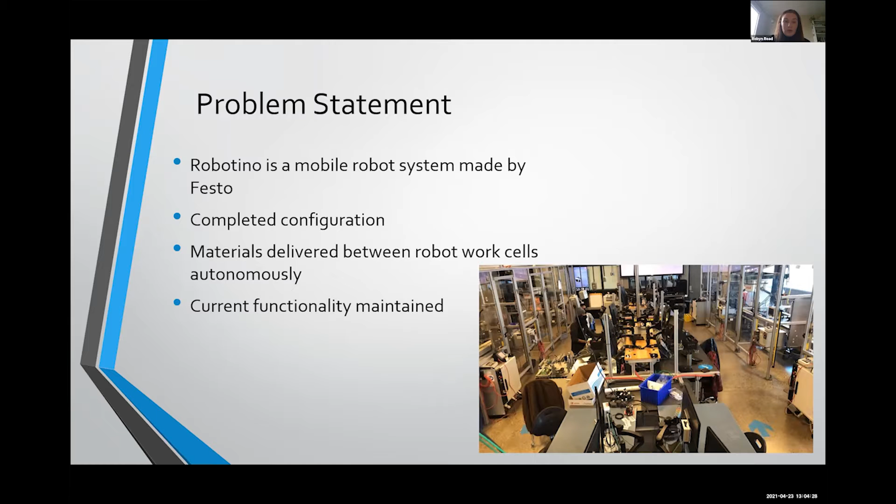The scope of this project involved the development of an autonomous guided vehicle that is based to work on a Robotino platform. It is commissioned for use as a method of transfer of materials between work cells in the SAIT Mechatronics lab. An example of the work cells are to your right there. Proper wiring has been completed on the Robotino based off the professional practice judgment guidelines used in mechatronic skills competitions, and electrical documentation has been provided. A gripper conveyor system has been designed to transfer parts.

The Robotino is programmed to autonomously function in the lab while students and instructors are present. Safety of instructors and students is a top priority. Autonomous battery tending is included in the functionality of the Robotino's programming, and this project will contribute to the vision of a fully autonomous lab. Next slide, please.

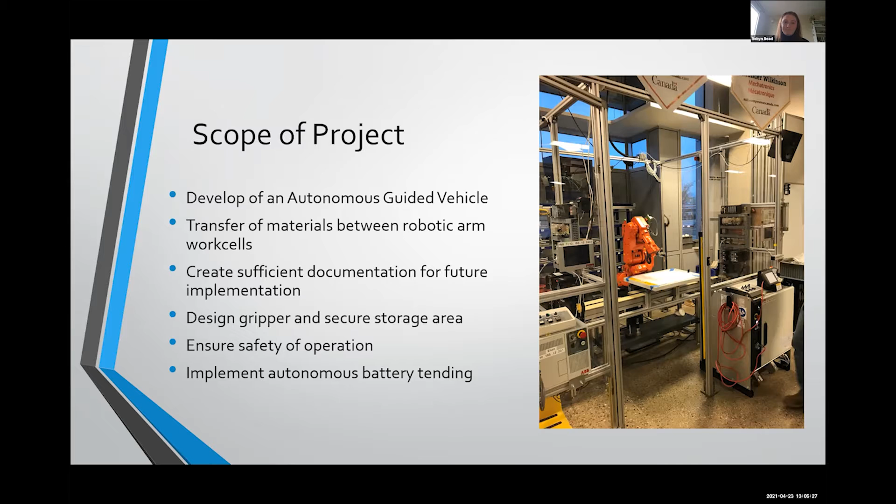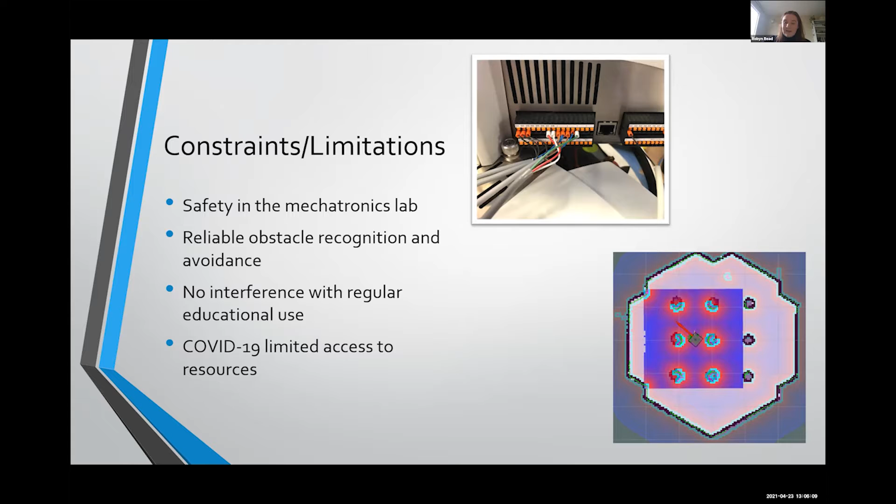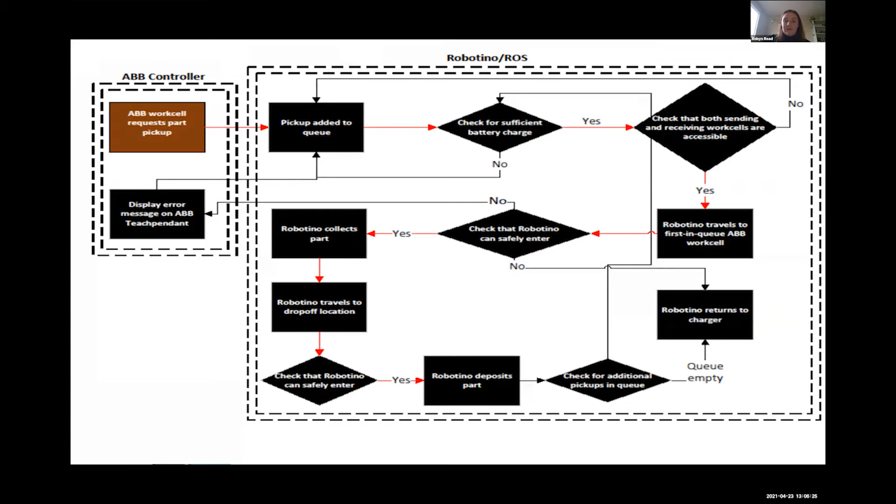The information hub will hold the status of the ABBs and confirm whether a call for transport is able to be placed. The team has programmed 2 executable procedures that are able to be added to any routine programmed on the ABB robots. These procedures will allow the user to request part movement from the Robotino. The user input will be sent to the information node where the status of each ABB is monitored. And if the ABBs are safely able to send and receive materials, the request will then be forwarded to the Robotino containing any necessary information such as coordinates for the pickup and drop-off. Next, we will go to Devin, who will discuss our program logic.

All right, so as we can see in the functional analysis here, once the pickup is requested, the first thing the Robotino does is check for sufficient battery charge. And it is able to do this because the battery information is constantly being provided to ROS in the event that it should be called. Before the call is actually placed, there's a great deal going on at once in the background, and that brings us to the strengths of ROS and why we chose it.

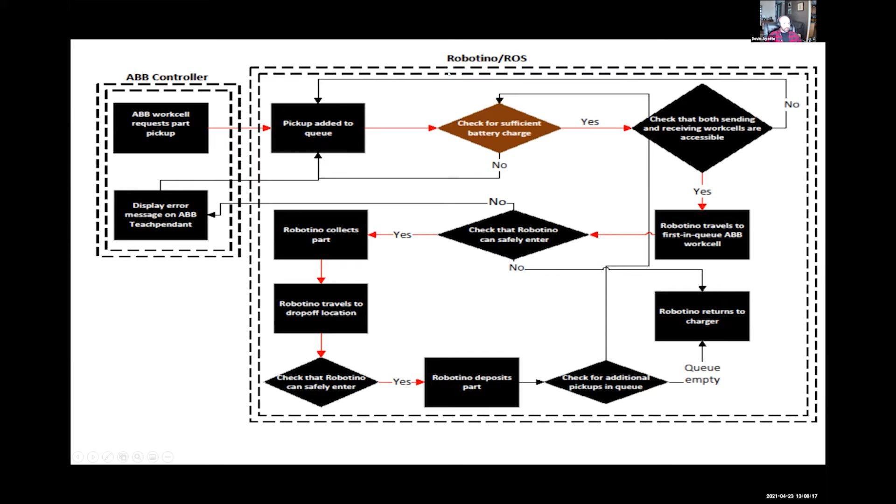It structures all of this inter-process communication in black boxes called nodes. So it's very easy to collaborate using ROS. You write your portion of it with a defined input and output, and this part can be used, reused, edited, and most importantly, developed independently of the rest of the program.

You establish what's going in, what's going out, and you don't need to coordinate as much with other groups or other members of the group as you're developing this. This makes collaboration simple, but it does come at the expense of some fairly inelegant solutions to very simple problems. And we'll get into this in our conclusion and recommendations.

We found that often the solutions that we were using provided by ROS were a lot more complicated than the problems, as there are many different elements, sources of information, inputs, outputs going into this program. And I will now pass it off to Damien to discuss the navigation.

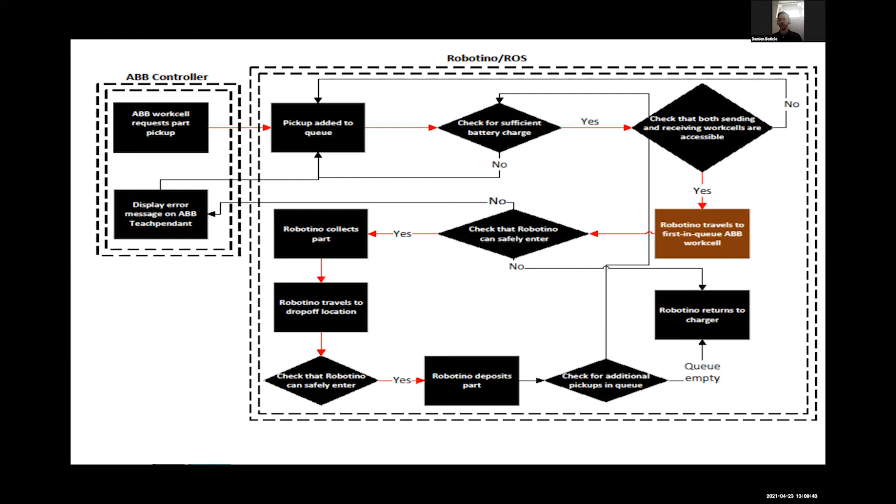Thanks, Devin. Next step is to travel between the ABB cells. And in order to do that, we make use of 9 existing infrared sensors at the base of the Robotino, as you can see in the next slide, bottom right picture, to sense close objects. In addition, we added a Kinect structured light depth camera for 3D imaging and long-range obstacle detection.

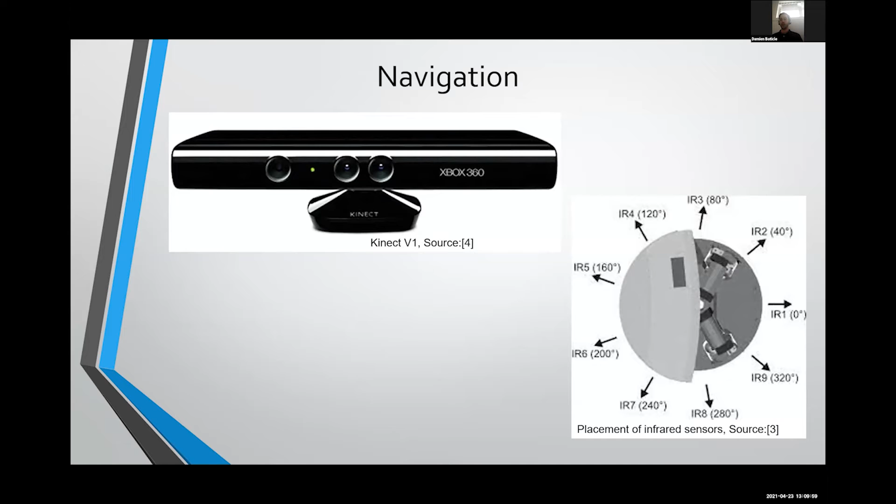On the next slide, you see we use the camera to localize the Robotino. We use the odometry data from the wheel encoders to counter for drifting of the Robotino, because the odometry data is not exact. We additionally use an algorithm named real-time appearance-based mapping, where a feature extraction algorithm loops over frames, 3 frames per second, and tries to match the current frame to a previous one.

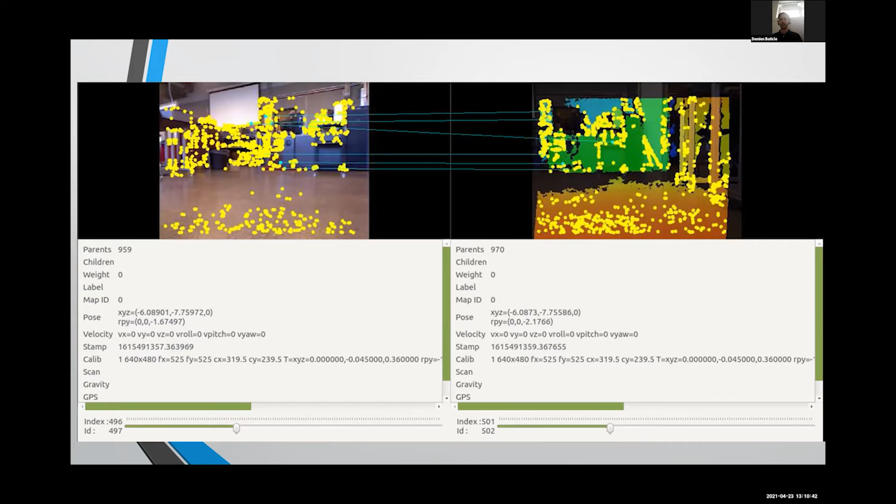This method is called loop closure. If a loop closure is detected, the odometry data is adjusted and the map is fitted accordingly. On the next slide, you'll see a complete 2D graph of our mechatronics lab, where the black area indicates obstacles and objects, the light gray area free zone, the dark gray area unknown environment.

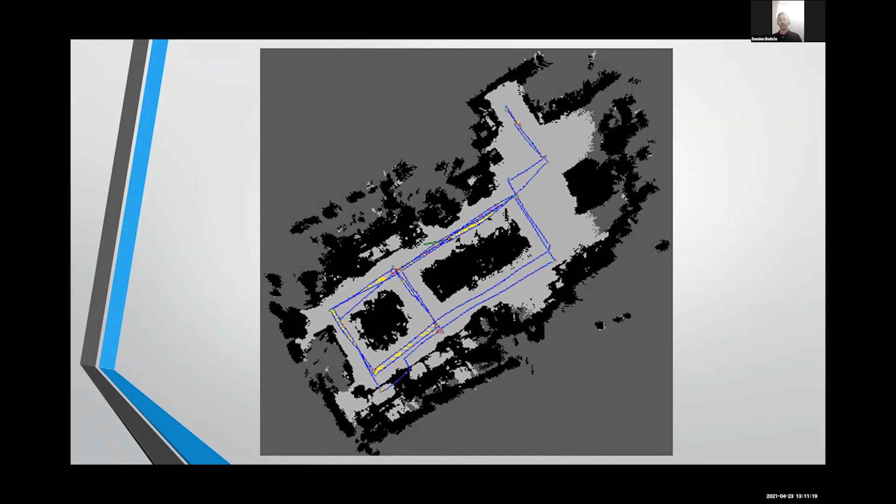The blue lines indicate the path we took while mapping, and the yellow lines in between indicate loop closure acceptances, and the red ones loop closure rejections. Using this, we were able to create a 3D map of the lab that you can see on the next slide. And now we're coming into the actual navigation part on the next slide.

The planner will avoid entering the occupied or inflated area with the footprint, and you'll see the whole thing functioning at the end in a quick video. I'll pass it off to Jackson with the gripper. And now we're going to talk about the gripper and how the Robotino collects a part.

Next slide, please. On our left, you can see a gripper model made in SolidWorks. How it works is there's a lead screw in the middle. The carriage goes up and down because the lead screw is attached to a motor at the bottom, connected to the lower mount. In the right image, you can see 4 limit switches and the springs, which control the opening and closing of the fingers. And you can see the fingers in the left image, it's all labeled.

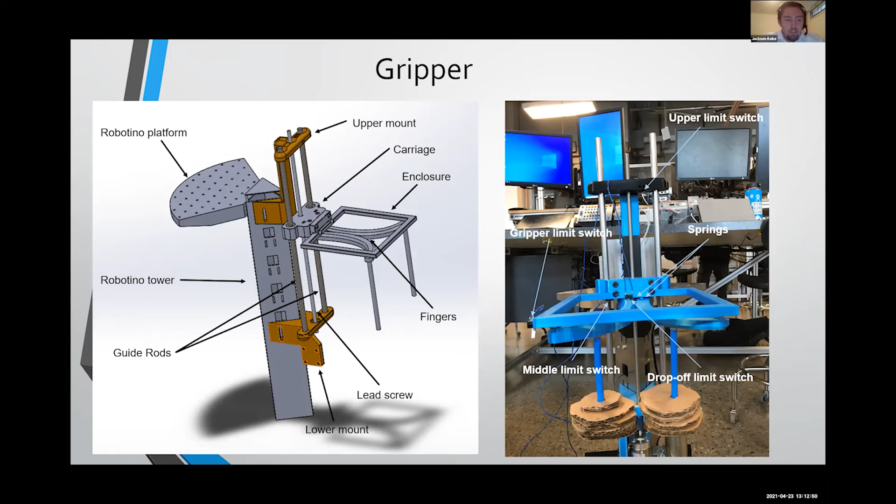Next slide, please. Now we'll watch a video of it all working. So here we call all of our routines. Now you can call the Robotino from the work cell using the teach pendant. See, it's autonomously navigating to the work cell.

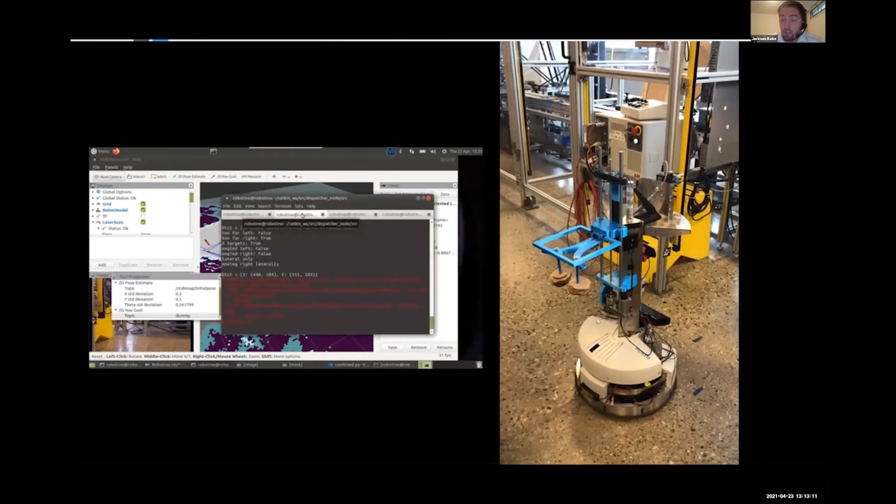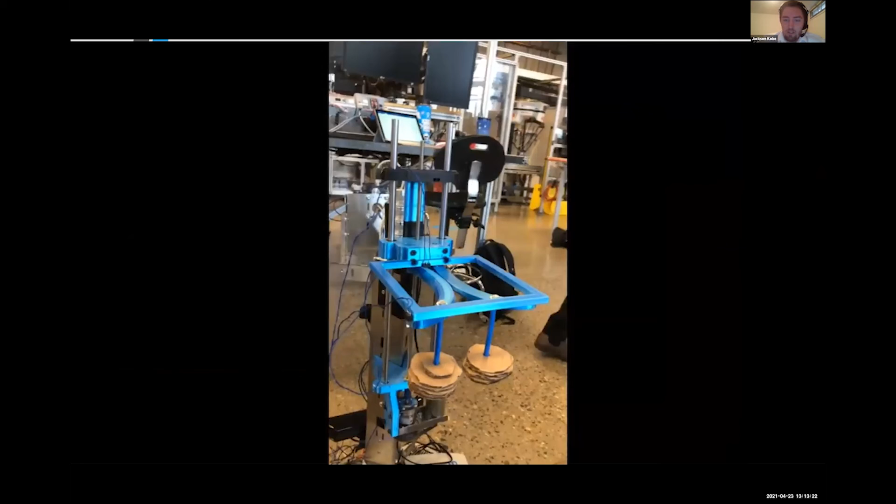Here it's really interesting because the robot is aligning itself using OpenCV, and with 3 dots it pretty much puts the center dot in the center, does a 180-degree turn, and now we got the gripper logic. See, so the carriage goes all the way to the top, it hits the limit switch, comes down for a certain amount of time. After that, it starts proceeding forward towards the conveyor.

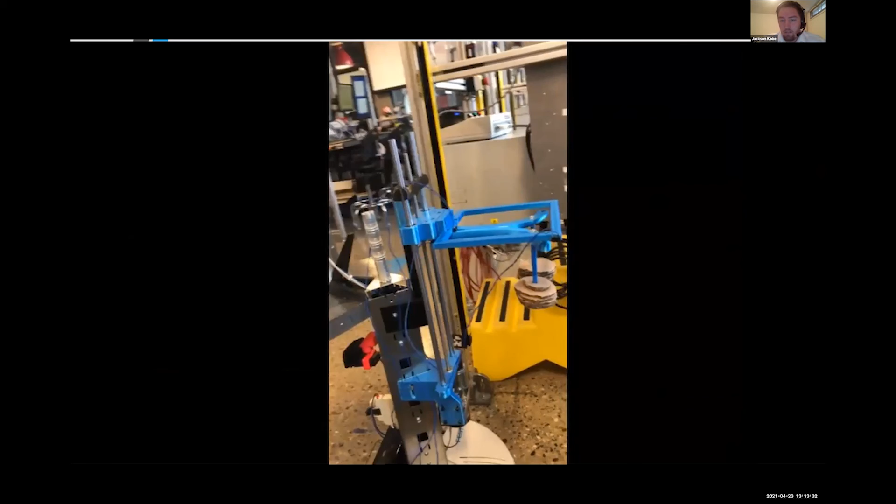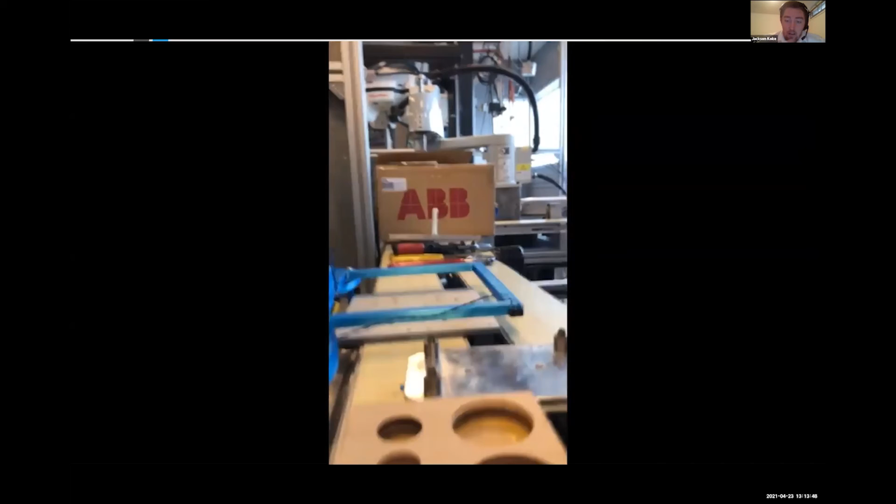And at this point, the finger extensions will start to open. See, and at the back of the finger extensions, there is a limit switch. So that signals the carriage to start moving down. Once the carriage has hit the conveyor, it will start backing out with the part secured. Beautiful.

Next slide, let's get to our conclusion and recommendations. All right, so in conclusion, our programming environment is a big part of it, and ROS was selected because it's flexible, scalable, and versatile. It can meet any of our clients' needs. It can do almost anything, we'll say that.

It's great to learn as a student and a teacher. It gives you relevant coding skills, C++ or Python, and knowing something about it as a future M&T student can benefit you greatly. And this is why we recommend the continued use of ROS for future projects using the Robotino. However, it's complicated, so we recommend narrowing the scope of future projects so that students will have the time and resources to correctly document what they've learned, and each succeeding project can build off of it.

And our last recommendations have to do with the gripper. Another iteration of the gripper is needed because in this last week we found a small design flaw. The guide rods do not have set screws attached to them, so one of them fell out and broke off a small piece of the Robotino casing. So we recommend adding those set screws. It's a good idea for a future capstone project. And our last recommendation is to add a forklift style attachment.